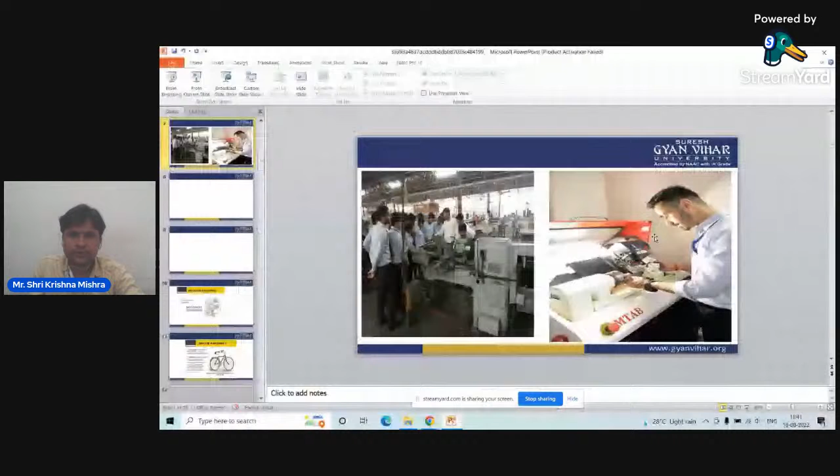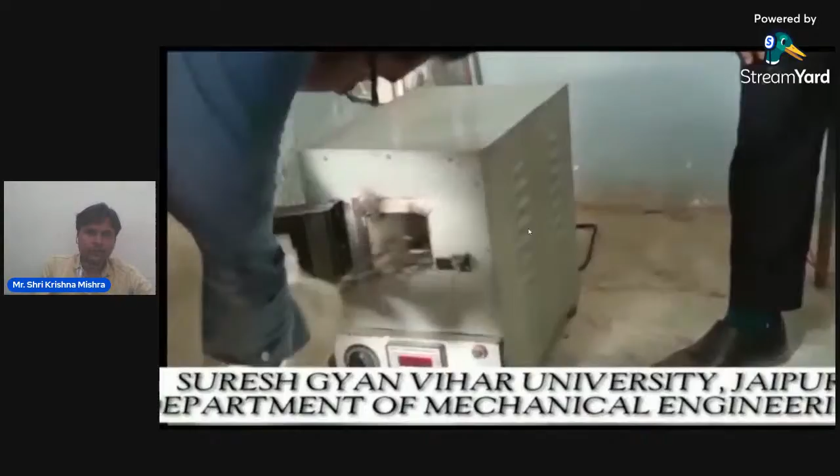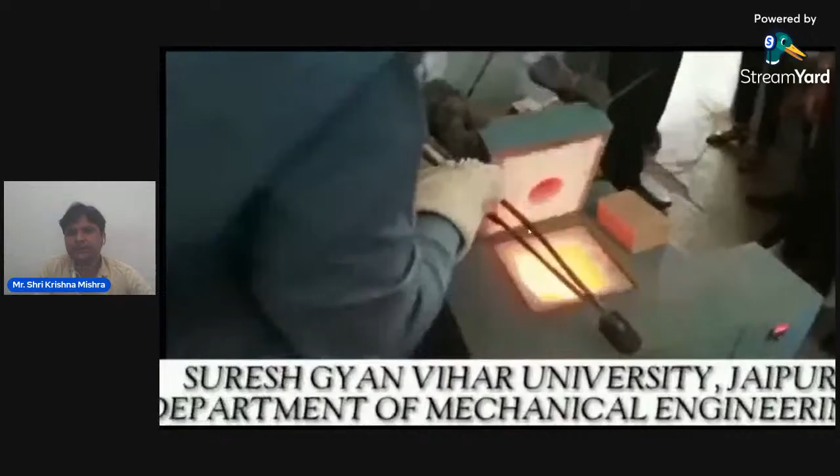Here in our university, in the mechanical engineering department, we focus on hands-on experience for students. The students themselves directly get involved in the experiments and projects. As you can see, here is the casting process which is being done, with the knowledge and experience of our faculties. Students are directly involved here. So this is the casting process.

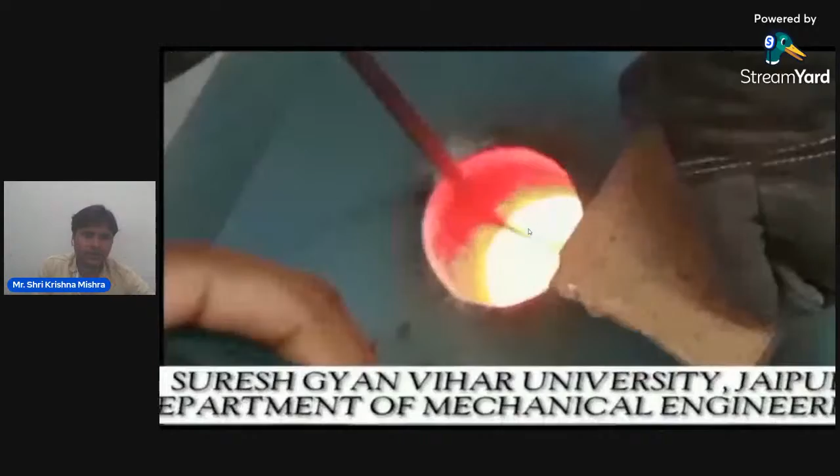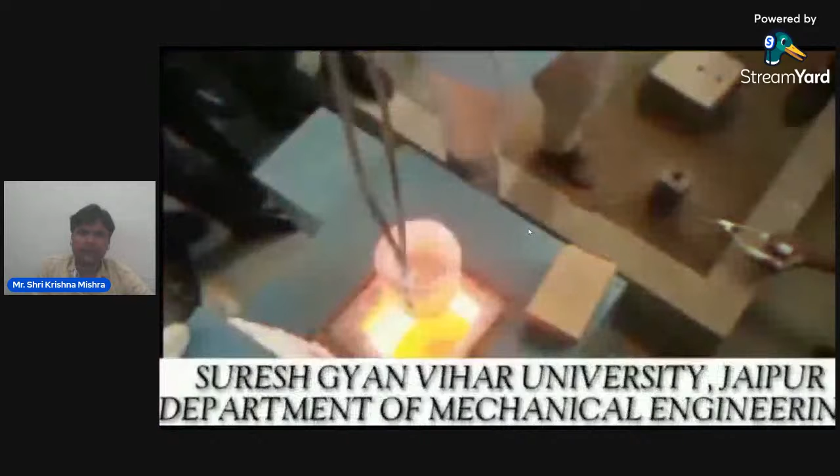This is basically the workshop lab which you are going to have in your first year of engineering. In this workshop lab, the casting process has to be explained to students. So not only theoretical, we also give practical knowledge of how this molding process, how the casting process is done. Directly, you yourself are going to prepare the casting, prepare the pattern, and finally prepare the mold. This particular video is showing the same thing. This is the pouring process which is going on.

Mr. Amit Tiwari, assistant professor in the Department of Mechanical Engineering, looks after the workshop lab, and as you can see, he is also visible in this video. So all this you are also going to do in your workshop practice lab in the first year of engineering. This is common for all the branches. If you are from the computer science branch, the mechanical branch, civil branch, or whatsoever, you are going to have this workshop practice lab common to all.

Then after, you can see there is the CNC lab also. Nowadays, everything is automated. If you want to do any manufacturing process, there are a lot of manufacturing processes. I will show you in the slide later on in this session. The manufacturing process I just now showed you in the video was the casting and molding process. And then you have the machining process.

On the left hand side, you can see few students working under the lathe machine, but that is a manual lathe machine in which everything is done manually, all the feed, direction, everything is given manually. But on the right hand side, you can see there is a CNC machine. Since everything is automated nowadays, we are well equipped in our university to give you facilities of these CNC machines. These CNC machines are very costly, and rarely will you find such facilities in many universities.

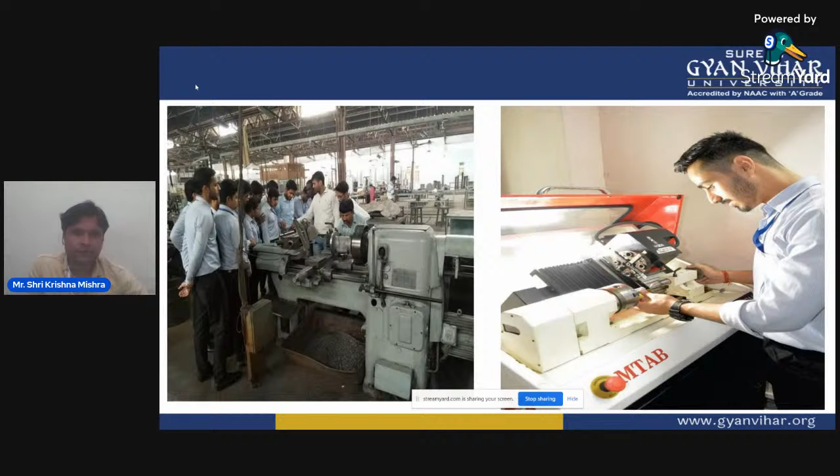In our university, we have the facility, and direct hands-on experience we give to students. Students directly work on these CNC machines, which are very costly, but for the future, for the knowledge of the student, the student directly gets involved in these particular machines. So all this you will find in our mechanical engineering department.

Now, as far as mechanical engineering is concerned, what is mechanical engineering? Here in mechanical engineering, you are going to learn about product life cycle management. You are going to learn about the design and analysis of manufacturing of industrial equipments, plants, machining, heating and cooling systems, transport systems, aircraft, watercraft, robotics, medical devices, and many more.

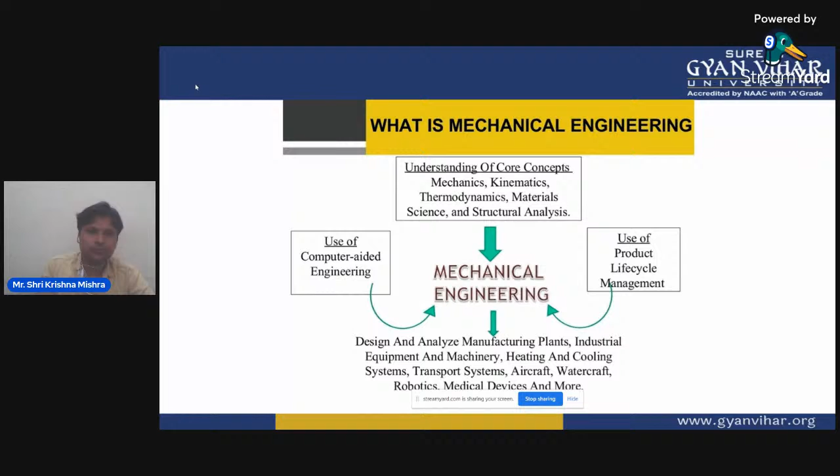The different disciplines of mechanical engineering are the sub-branches of mechanical engineering. If you are going for higher education, for an M.Tech course after your B.Tech, you have to go into deeper study. So these are the subtopics in mechanical engineering: mechanics, robotics. Robotics is very important nowadays because drones and robots are now the demand of the industry, everything is getting automated. Therefore, we have mechatronics, a combination of mechanics, mechanical, and electronics. Every machine is getting automated, meaning we are using electronics and mechanical both together. So mechatronics is a subject which is very important. These are the disciplines.

Apart from that, if you want to pursue interest in structural design, there is structural analysis, then you have thermodynamics, then thermoscience, and then we have design and draft. So these are the disciplines of engineering.

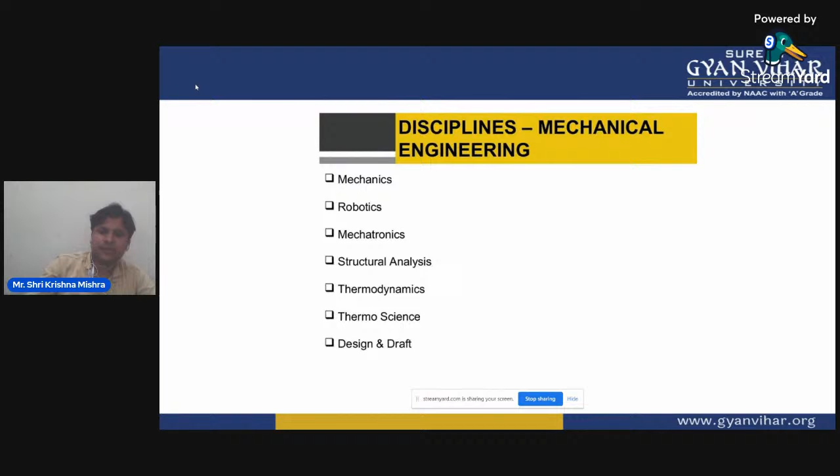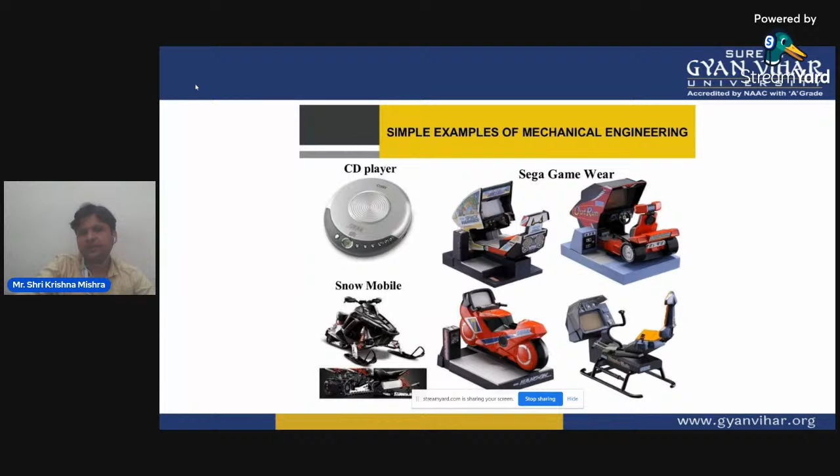Now, for your broad understanding, these are simple examples of mechanical engineering. This CD player is framed by a mechanical engineer. These games which you generally see nowadays in malls are all framed by a mechanical engineer. All these appliances are a small example of what is there in mechanical engineering, what you do after the mechanical engineering course.

Now these are the frontiers in mechanical engineering. As I have already told you, robotics is one of the important aspects of mechanical engineering. Then there is composite material study, biomechanics is there, aerospace is there, and one more thing, nowadays work is done on the nano basis.

The work is done on the nanotechnology basis. This is the trend nowadays. Everything nanotechnology is very much in demand, and therefore this is also taught in our university. And then we have microelectromechanical systems, MEMS. So these biomechanics, aerospace, robotics, composite materials, nanotechnology, these are the new frontiers in mechanical engineering. More and more exploration is done in these fields.

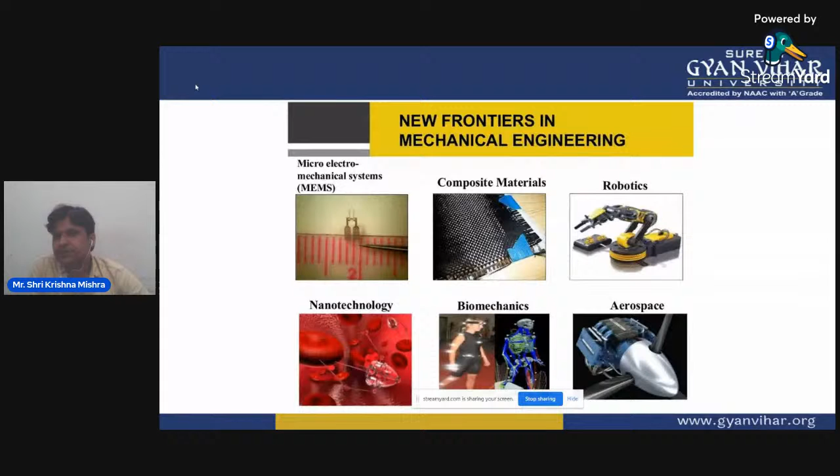Career paths for a mechanical engineer. So what are the options? Candidates after completing a degree in mechanical engineering can get high profile jobs with good remuneration in all industry sectors or other renowned private firms. They also have the option of government jobs.

So if you are pursuing your degree in any of the core branches, like mechanical engineering is a core branch, electrical engineering is a core branch, civil engineering is a core branch, electronics is a core branch, in these core branches there are a lot of government job opportunities. Apart from private companies, you have a lot of vacancies in government sectors also in which you can apply.

And also one more thing is that those jobs which are from the software side, from the IT sector, you are also eligible to apply for those. And if you have some knowledge of software, then you can also get a job in IT sectors. So in short, those who are pursuing their engineering in the core branches have their direction, their future open in all the sectors.

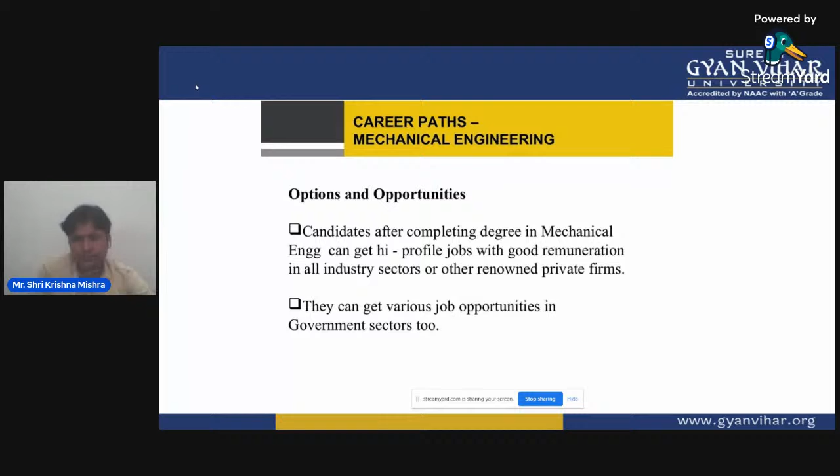Now, as I have already told you, career paths in mechanical engineering include the automobile sector. All the automobiles which you see running on the roads, like all the SUVs, all your four wheelers, two wheelers, these all come under automobile. And those who are mechanical engineering graduates can apply for jobs in the automobile sector.

Then in the biomedical sector also, all these artificial limbs, for example, you would have seen many of their stents. We frequently use this word that if someone has got surgery, then they use some mechanical devices. So these mechanical devices are named under biomechanical devices. So that is also one of the career paths.

Then in the energy sector, like thermal power plant, solar power plant, hydropower plant, nuclear plant, you can also get jobs in this energy sector. Then air conditioning is also there, and HVAC, meaning heating, ventilation, and air conditioning also. You can get jobs there too. In air conditioning also, these air conditioners, fridge, chiller plant, you can get jobs in this field also.

Manufacturing is also there. If you want to work in any manufacturing company, manufacturing can be of any type, the company can manufacture any product. So you have your career option open for a manufacturing organization which manufactures any type of product.

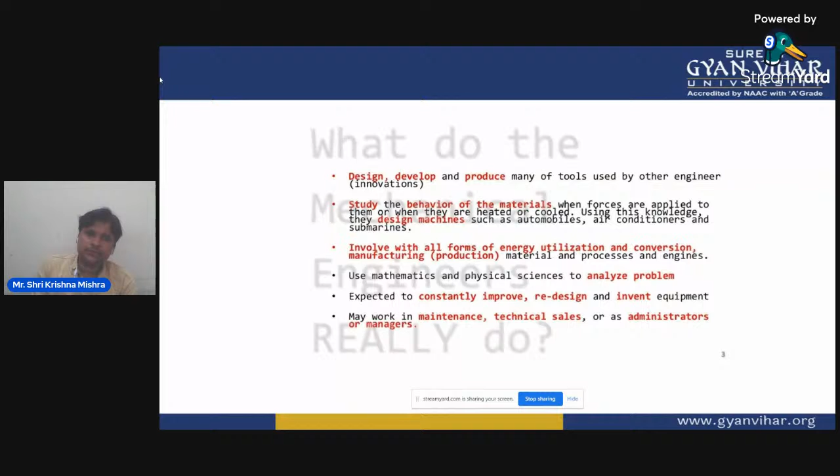Then here you are involved with all forms of energy utilization and conversion. Use of mathematics and physical sciences is also there, to analyze problems. So apart from this, what do mechanical engineers do? This also you should know. Basically mechanical engineering is concerned with design. In short, we can say it is concerned with the design, development, and manufacturing of machines and mechanical engineering systems.

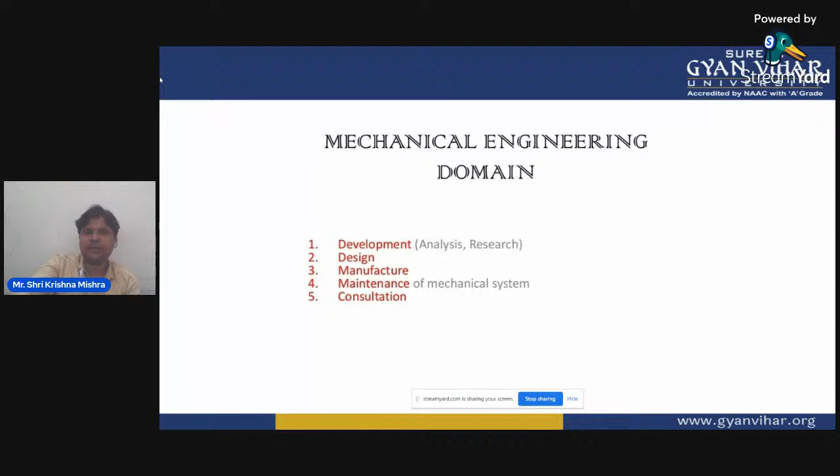Mechanical engineering as a profession leads you into one of the broadest areas of engineering. There are jobs for mechanical engineers in nearly every area of industry, as I have already told you. The mechanical engineering domains are design, development, manufacturing, maintenance, and consultation. I already discussed this with you; this is a quick revision so you can easily grasp what you are going to learn.

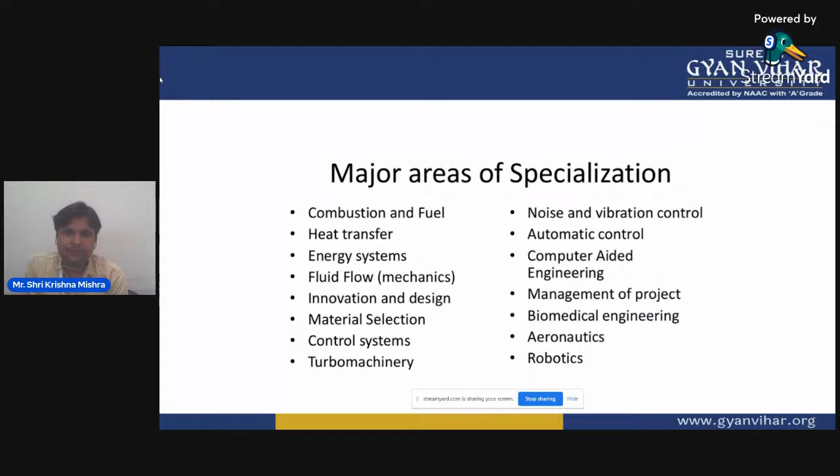Major areas of specialization include robotics, aeronautics, biomedical engineering, and project management. Apart from that, there's combustion and fuel, heat transfer, energy systems, fluid flow, innovation and design, material selection, control systems, turbomachinery, noise and vibration, automatic control, CAE (computer aided engineering), project management, biomedical engineering, aeronautics, and robotics.

How do you become a mechanical engineer? First of all, what are the prerequisites? If you are going to pursue mechanical engineering, these are the needs, the basic requirements.

You should have a strong interest in mathematics and science. You should have strong social awareness and concern for the quality of life. Third, you should have a desire to put ideas into action, meaning whatever ideas come into your mind, you should be able to put them into action. That is done in our university with the help of projects, which are prepared by students in every lab in every semester. Through these lab projects, you put your ideas into action.

You should also have curiosity about how things work and how to make them better. You should have a good academic background, meaning you should have interest in mathematics and science, as I already told you in the first point.

You should have the ability and determination to succeed and to continue self-education upon completion of your studies. One more thing common to all fields: you should have good communication. If your communication is strong, you are able to explain whatever is in your mind, and that increases your chances of getting jobs at the time of interview. Good communication and a good resume are basic requirements at the time of interviews in companies; they increase the chances of your selection.

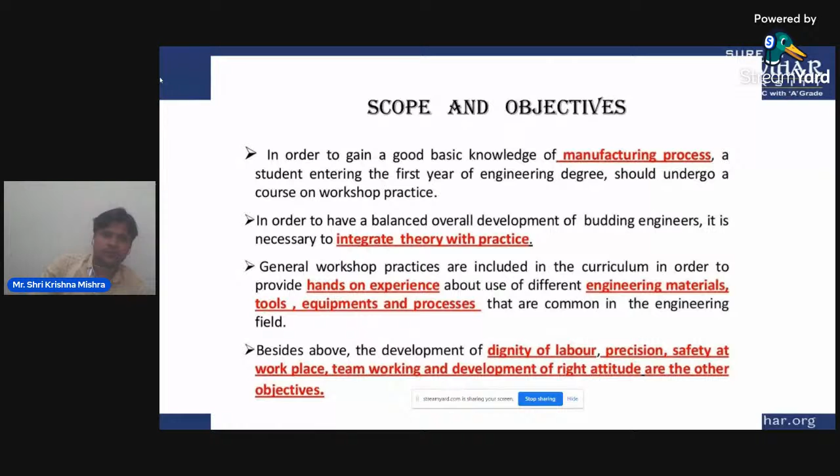What is manufacturing process? It is the sequence of operations wherein the input material is converted and transformed into finished products by using human effort or a machine.

Input materials can be your working materials or auxiliary materials. Output material can be your product, whatever you are going to manufacture through the manufacturing process. There is always some waste also created, because 100% efficiency is not possible. So output material is your product as well as the waste material.

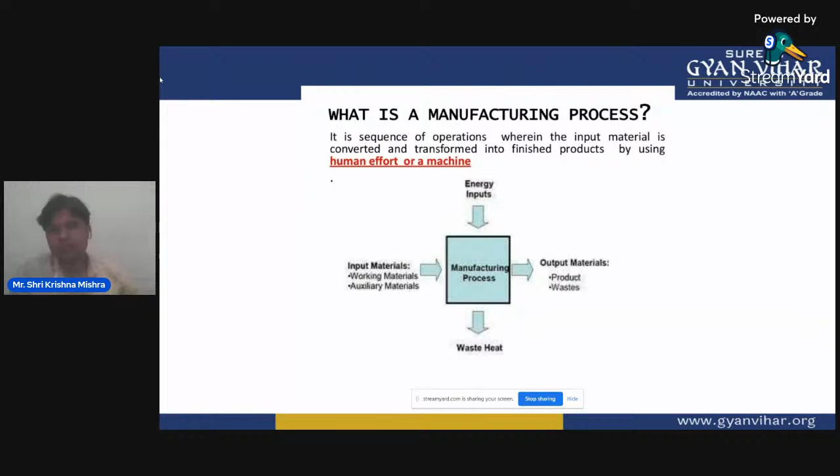You have to give some energy input also. So raw material plus energy input are fed to the manufacturing process, and you get the output material and the waste heat. These are the different types of manufacturing process. You can see a particular person in the workshop doing activities like carpentry and machining. These are examples of manufacturing process.

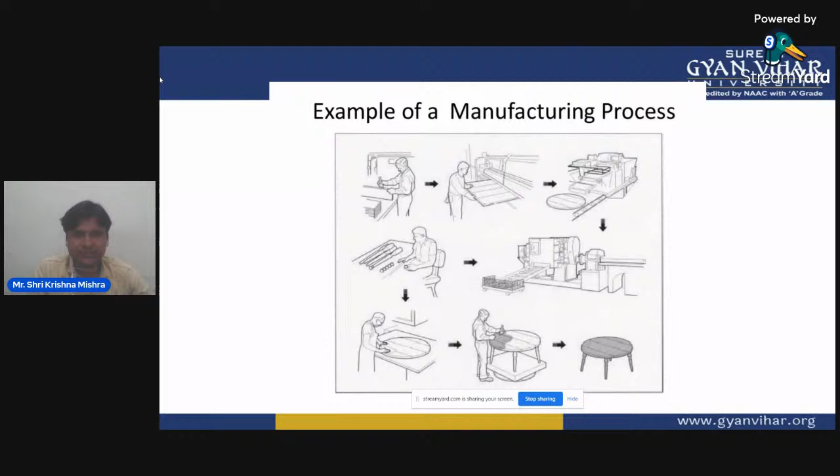What is basically workshop practice? Workshop practice gives the basic working knowledge required for the production of various engineering products. It explains the construction, function, use, and application of different working tools, equipments, machines, as well as the technique of manufacturing a product from its raw materials.

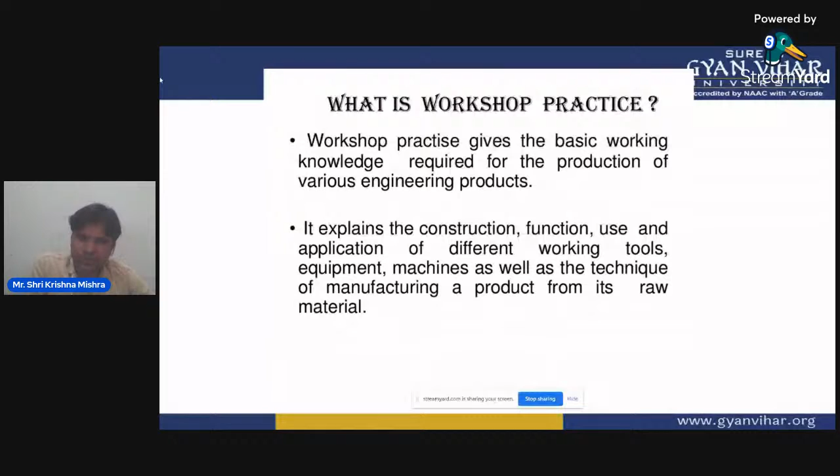What are the different trades in workshop practice? You are going to learn about carpentry in the carpentry shop, and fitting, which is the joining process, in the fitting shop. Then you have the plumbing shop, where all these taps and pipes come in. You have the electrical shop, the sheet metal shop, and the most important welding shop. These are the trades in workshop practice which you are going to do in the practical.

Carpentry, as you all know, is the process of making wooden components. It starts from a marketable form of wood and ends with a finished product. It deals with building work, furniture, cabinet making, etc.

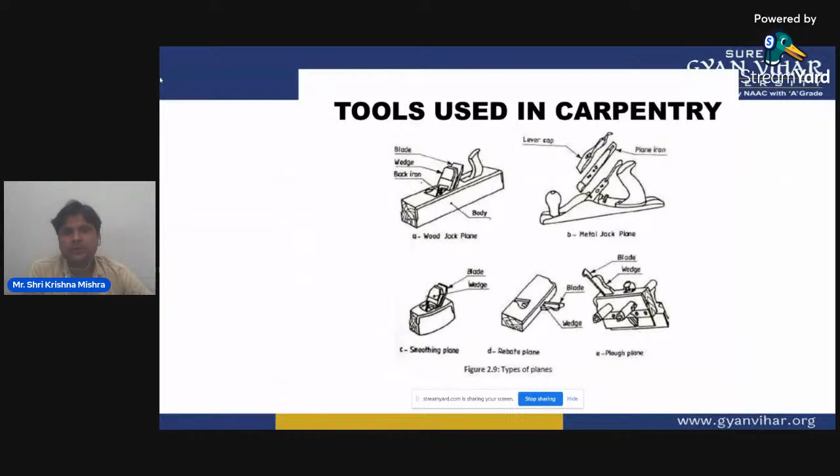Apart from this, these are the tools used in the carpentry process. You will see these tools in our workshop when you come here. Other tools include saw, compass saw, firmer, dovetail, mortise. You are all going to see these here.

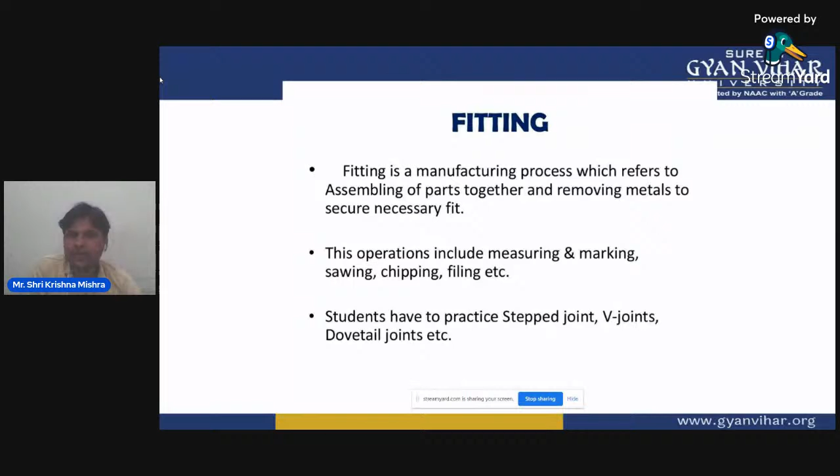Then the second process is fitting. Fitting is the manufacturing process which refers to joining or assembly of parts together and removing metal to secure necessary fit. This includes operations like measuring and marking, sawing, chipping, filing, etc. Students have to practice stepped joints, V joints, dovetail joints, etc.

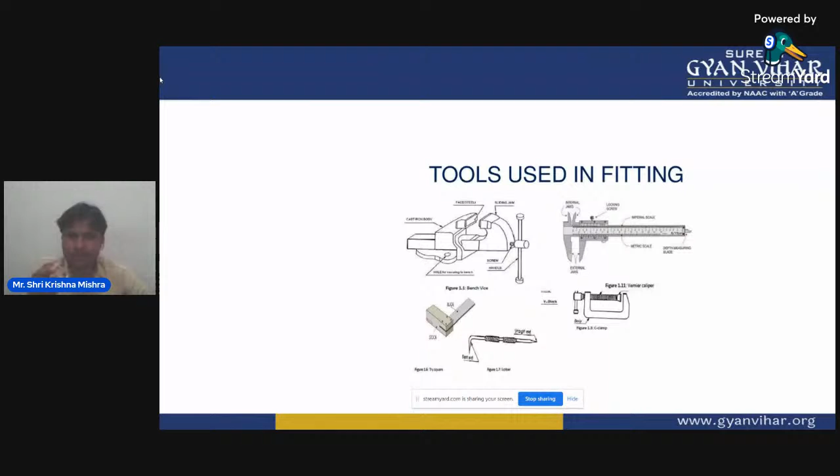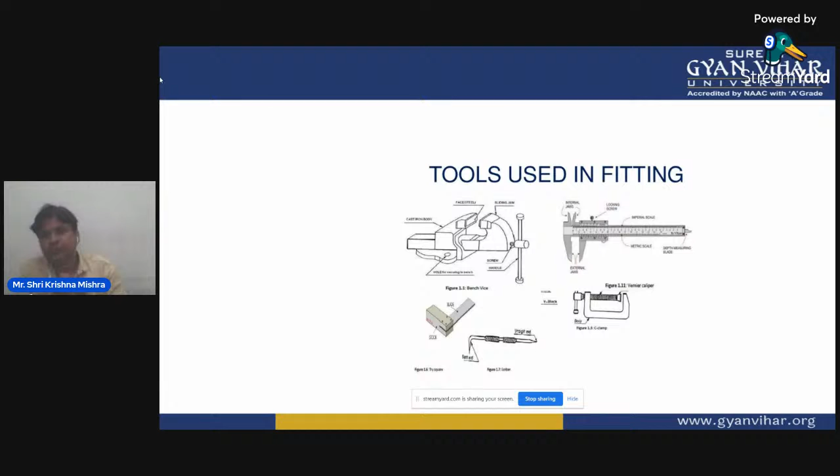These are the different tools used in fitting. As you can see, there is a vernier caliper at the top right corner, a screw gauge, and this angle measurement tool. You have a bench vise, which is basically used for giving a firm grip on the workpiece on which you are going to do your fitting work. These are the tools of fitting.

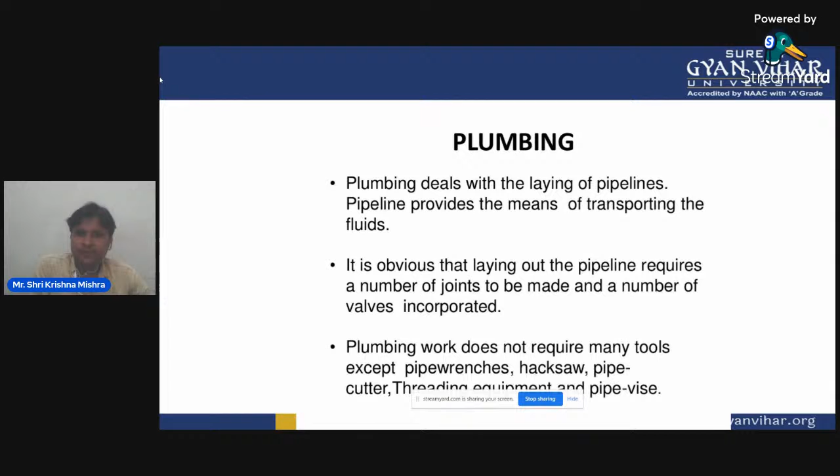One more process you will find in the workshop is the plumbing process. Plumbing deals with the laying of pipelines, which provide the means of transporting fluid. Laying out a pipeline requires a number of joints to be made and a number of valves to be incorporated. Plumbing work does not require many tools, except pipe wrenches, hacksaw, pipe cutter, threading equipment, and pipe vise. This is the plumbing process.

Through the electrode holder, you hold the electrode, and an electric arc is generated wherever you want to do the welding or joining work. So this is all you will do here also. You will do welding directly, and you will see how the welding process is done. Generally, we have seen this in workshops outside in companies, but you yourself will see how this work is performed.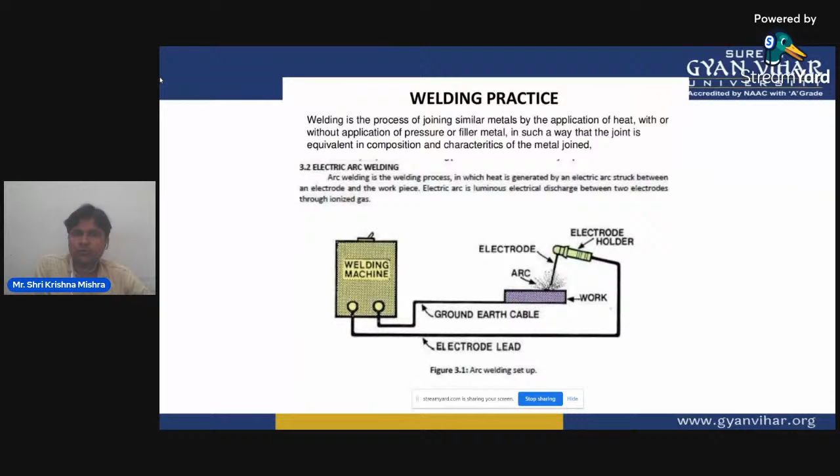Welding joints and weld positions - these are the different welding joints which can be obtained through welding.

Now, this was all the description related to the workshop practice lab which you are going to have in the first year, either in the first semester or the second semester.

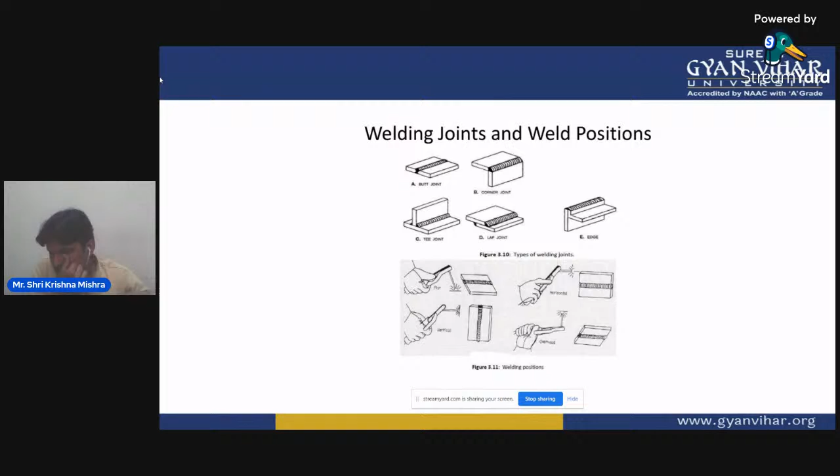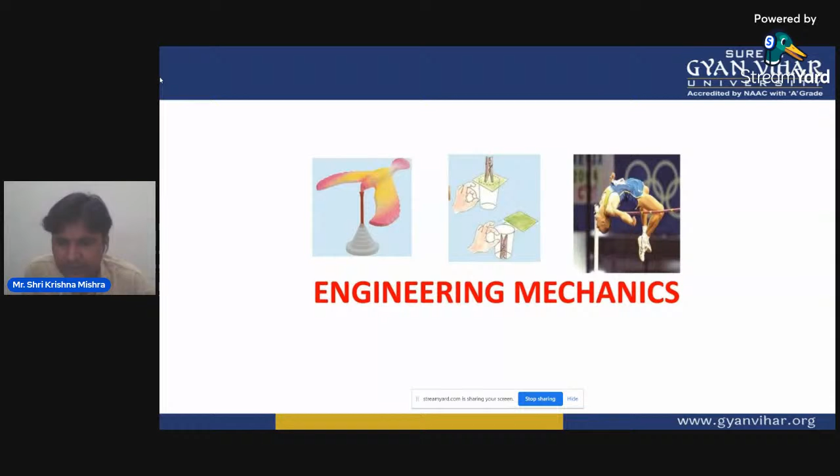Then you have one more subject in the first year known as engineering mechanics. This is also somewhat related to your mechanical engineering. Here, basically, you learn some of the theory of physics which you studied in 11th and 12th, like linear motion - this will all be revised here in engineering mechanics.

Apart from that, a few more topics will be there, like center of gravity, which you have already studied - we will elaborate on this topic more because these topics are very important. As far as your engineering is concerned, you are going to learn about the equilibrium of forces.

Again, you are going to have advanced knowledge of friction. Then you are going to have knowledge of linear motion, projectile motion, circular motion, and more. One more thing - you are going to learn about the principles of lifting machines.

As you know, there are a lot of lifting machines nowadays. To lift a very heavy object, you don't need too much power. Why? Because there are some principles which are used to lift a heavy block.

So basically, these are known as the principles of lifting machines that we will study in this engineering mechanics subject. This is basically a theoretical as well as practical subject. You are going to have theoretical knowledge in which we will solve many numericals. Through those numericals, we will have a more clear understanding of the concept, and we will also have practicals which will give a stronger understanding of the phenomena or theory we are studying.

Then we are also going to learn about trusses. Trusses are one of the important topics as far as construction of bridges is concerned. Bridges or any construction - for example, if you see any road flyover, before making the flyover you have to construct a type of truss. So trusses, beams - these you are going to learn in this engineering mechanics subject.

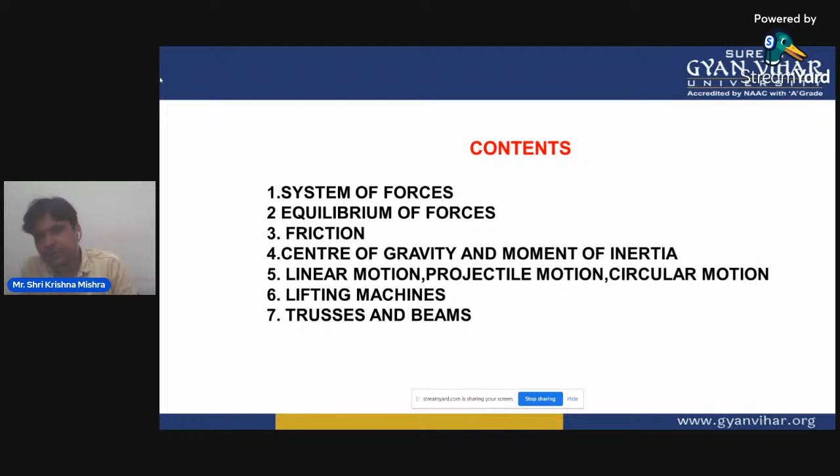Mechanics has already started, but in engineering mechanics, you are going to learn about those particular aspects of mechanics which have an engineering connect. This slide is showing you the different systems of forces - coplanar forces, non-coplanar forces. This is all we will teach you in the engineering mechanics subject.

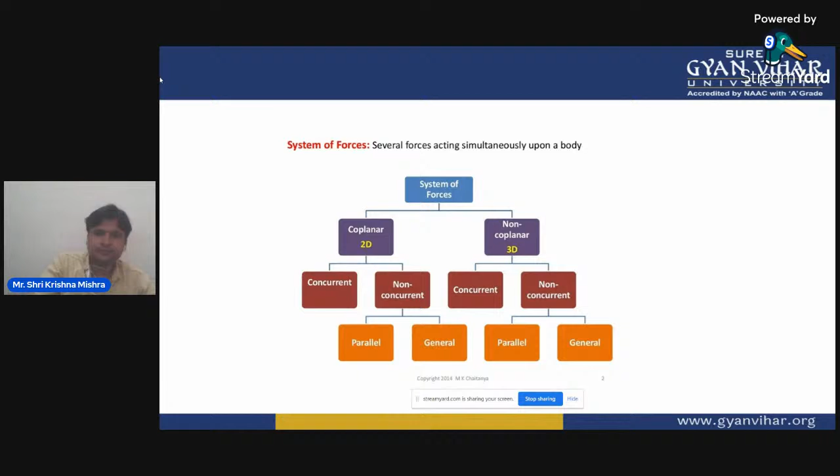Now, one more subject apart from this is your engineering graphics and design lab. This is also one of the important labs, and I will be dealing with this particular lab in your first year.

In engineering graphics and design, basically, one thing I would like to tell you is that the drawing you make in art is artistic drawing, in which you don't take care of dimensions or any technicalities - there is no technicality in artistic drawing. But when we talk about engineering drawing, it is basically a drawing of an object that contains all information. It will give you information about the actual shape of the object, accurate.

It will be of accurate size. It will also tell you about the manufacturing methods by which that particular object can be manufactured, and it will give you knowledge about the shape, size, and method required for the construction of the object. No construction or manufacturing of any engineering object is possible without engineering drawing.

You would have seen a civil engineer, while constructing any apartment, villa, or road, holding a drawing in hand. With the help of that drawing, they understand what has to be manufactured, what should be the size and dimensions of the different doors, windows, and everything in a particular construction. By viewing that piece of paper, that drawing, the engineer should understand what has to be manufactured. Therefore, it is very important that an engineer should have knowledge of engineering graphics also.

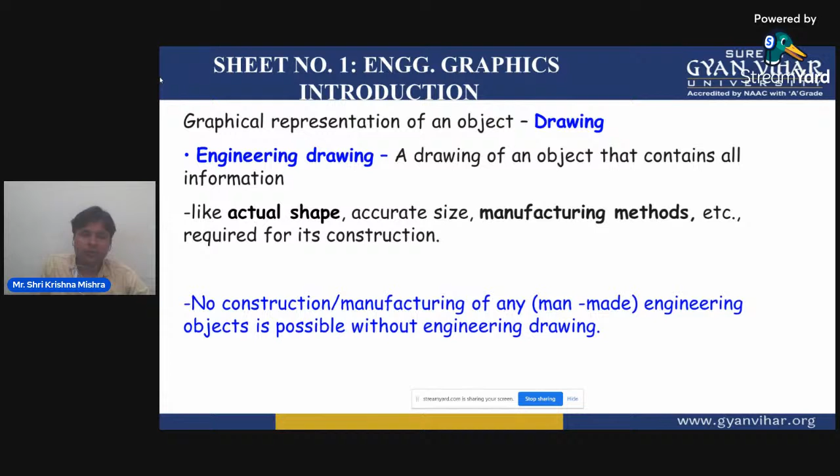In other words, it is also known as engineering drawing, and the lab is known as Engineering Graphics and CAD. Why CAD? CAD is the short form for computer aided design. Nowadays, manual drawing is not very frequent; everything has changed, everything is automated and computerized. In the same manner, with the help of software, drawings are prepared nowadays.

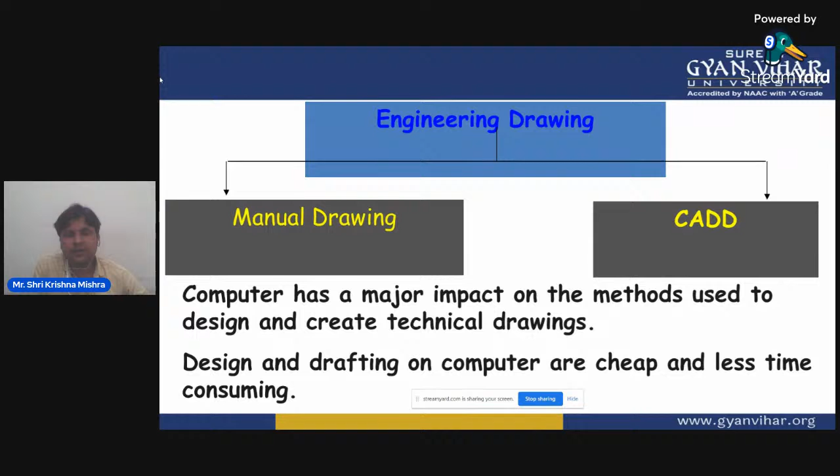So first, in this lab, you are going to learn about manual drawing, because before switching into CAD mode, you will have to gain knowledge about manual drawings also. There are a lot of concepts which have to be developed; they all come under manual drawing, and after that, there is CAD, computer aided design and drafting.

So you can see that this Engineering Graphics and Design lab is a very interesting subject. You will find it very interesting when you come to the classes.

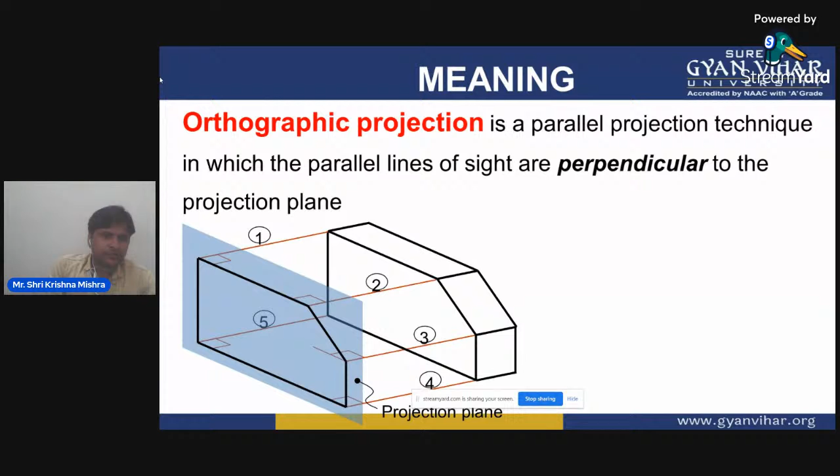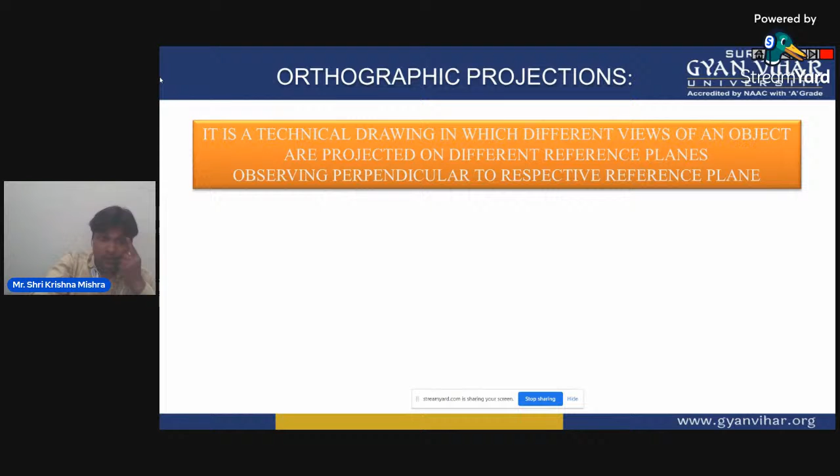If I define orthographic projection, it is a technical drawing in which different views of an object are projected on different reference planes, observing perpendicular to the respective reference plane.

What are the different reference planes? Horizontal plane, vertical plane, or the side plane, which is also known as the profile plane.

What are the different views we are obtaining? If we see any object from the front, the view we get is the front view. If we see any object from the top, the view we get is the top view. If we view any object from the side, the view we get is the side view.

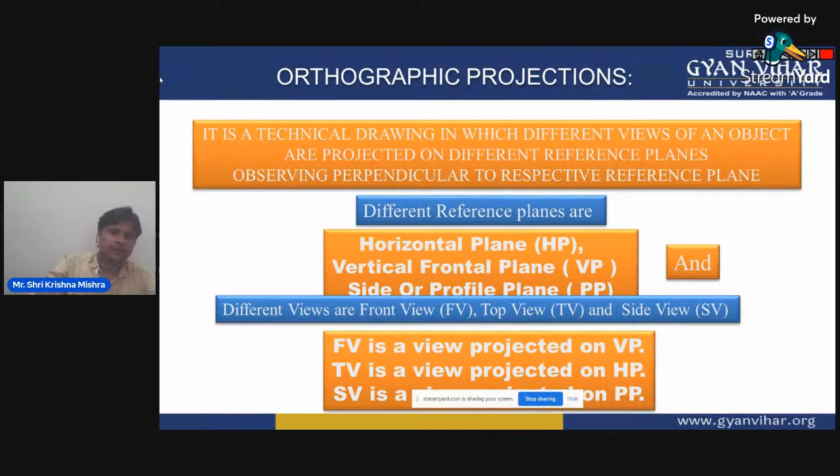Front view is projected on the vertical plane, top view on the horizontal plane, and side view on the profile plane. We will study this later on. For today, it's enough that we know what projection is.

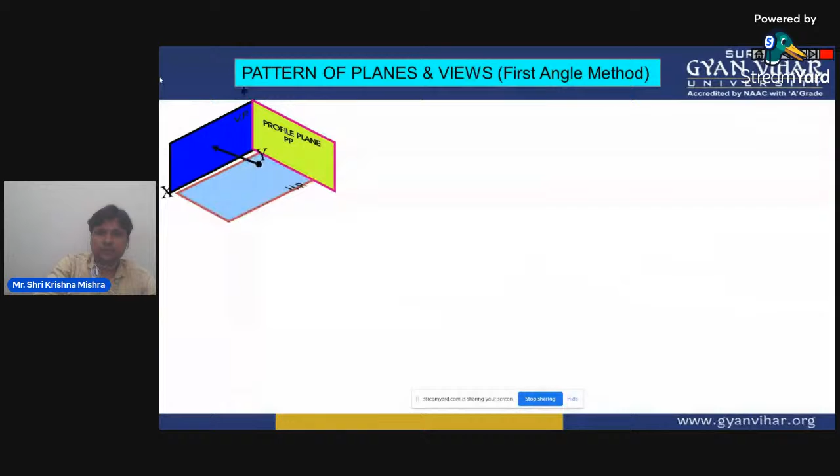Then there are different projection methods. One is the first angle projection, second is the third angle projection. No need to go deep into that today.

This is the first angle projection, this is the third angle projection. For today I am skipping this because later on we are going to study this in detail for our subject also.

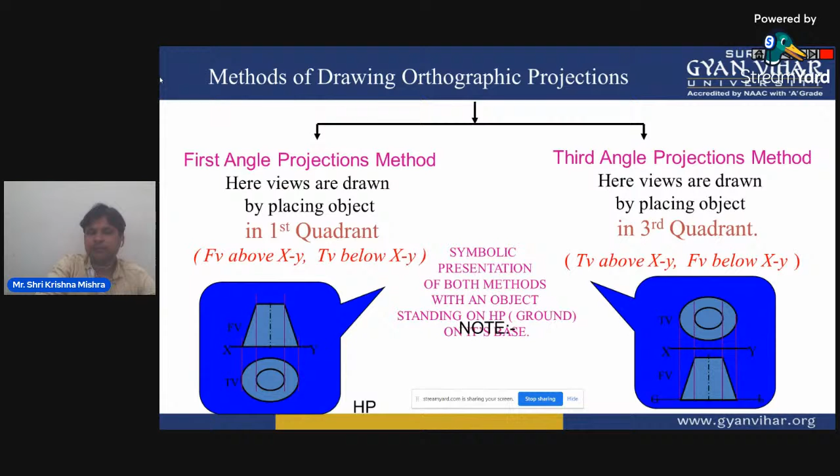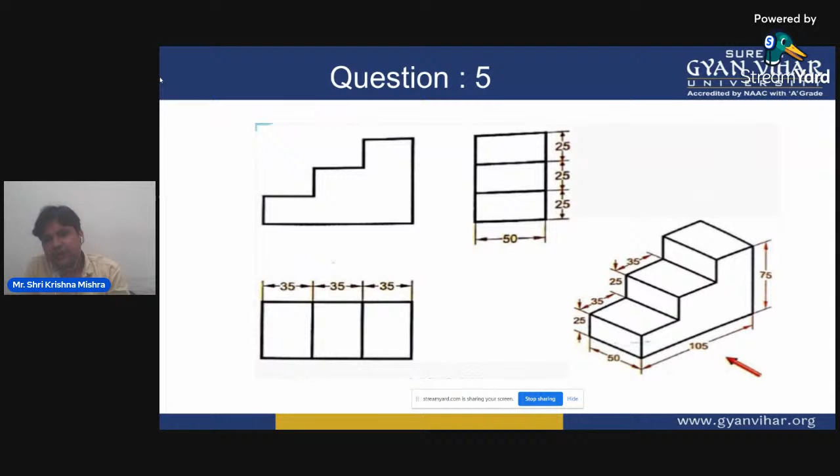These three views which you are seeing separately are the orthographic projection, and the complete single view you are getting on the right is a different projection method, known as isometric projection.

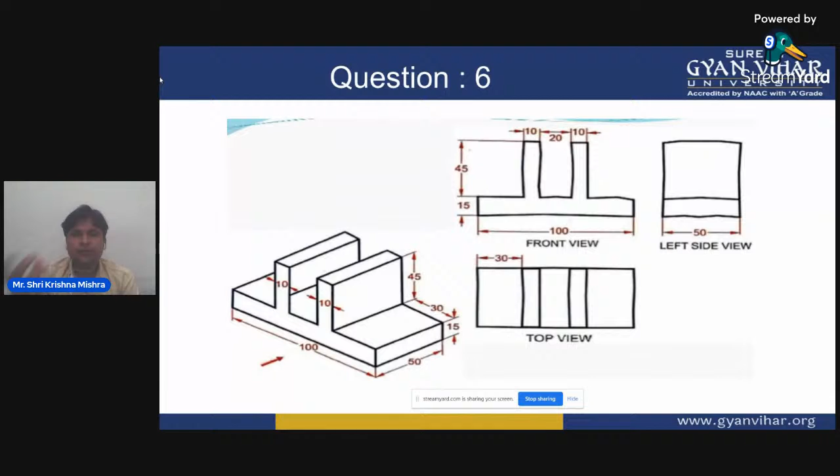As I have already told you, AutoCAD software is also there. There are a lot of software used now for drawing and designing purposes. Among them, the oldest and most versatile, universally used software is AutoCAD. We are going to learn about this software in our design, engineering, graphics, and CAD lab.

All right, students, I think this much is enough for today. I have given you a brief understanding of all the subjects you are going to be taught as far as mechanical engineering is concerned. These subjects will be common for all the students of all the branches.

Why are these subjects taught to all students of all branches? Because you should all have a brief knowledge of each and every branch. Therefore, these subjects are taught. So I hope this much is enough for you.